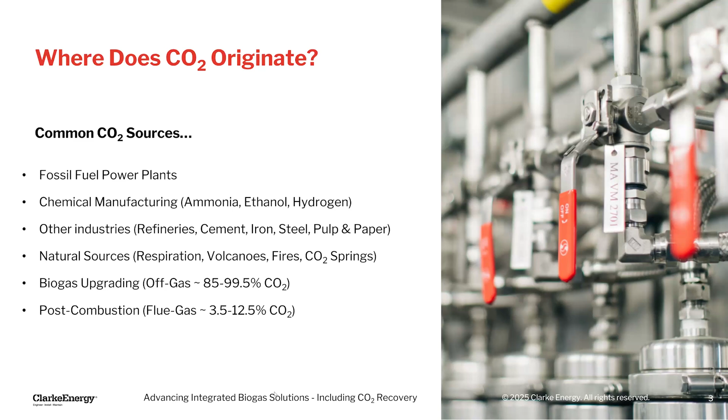Also, post-combustion sources. If you have a CHP project with a reciprocating engine, for instance, using pipeline gas, the CO2 content tends to be a little lower. Biogas tends to be a little higher, but 3.5 to 12.5% is probably a good rough estimate for the average CO2 content in the flue gas after combustion, with the bulk of that being nitrogen.

So then, how is CO2 used? CO2 has a lot of commercial applications in the world around us. Obviously, it's used in agriculture for a lot of purposes. You could put it into a greenhouse.

It exists at a couple hundred parts per million already in the atmosphere, but if you increase that by a couple hundred more parts per million in a greenhouse, you'll see a boost in the yield and production of that greenhouse. You could also use it in fumigation, fertilizer production, and other agricultural purposes.

It's used as a concrete additive. Meat and food processing facilities use it too. You produce dry ice blocks or pellets that can be used for cleaning processes, or shipping and packing meat products and other food products.

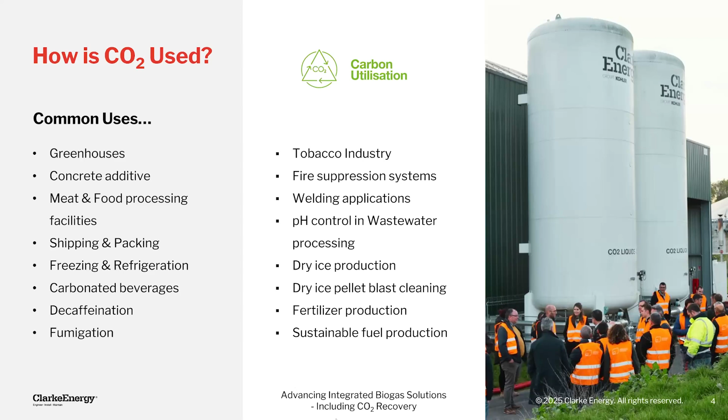Obviously, carbonating beverages—we all drink a lot of carbonated beverages, and that requires CO2 to be introduced into that product. Decaffeination and the tobacco industry have a need for CO2, as do pH control in wastewater facilities and fire suppressant systems. The list goes on. Even sustainable fuel, creating methane back from CO2, is another process with a lot of development. So there's no shortage of uses in the world for CO2 as a commercial product.

Now I want to highlight some of the states you'll see CO2 in. Obviously, you can see it as a gas. You can compress it, liquefy it, or make solid dry ice out of it. If you have gaseous CO2, it has fewer CO2 molecules per volume, so it's usually used more locally on site.

If you compress it, that requires energy, but you'll fit more molecules in the same volume and can potentially transport it more effectively. You could also liquefy the CO2, which gives a higher density of CO2 molecules per volume of space. That requires more energy but allows you to ship that CO2 more effectively. One thing to note is that liquid CO2 storage tanks tend to be a little higher in cost than gaseous storage.

Or you could make solid CO2, or dry ice, which is the highest density solution for the state CO2 could exist in. You could make blocks or pellets out of it, which can be used directly as a refrigerant or freezing agent. But note that you'll typically see a loss during dry ice production. So if you have a certain weight of liquid CO2 and create dry ice, you'll end up with roughly 75% of that weight as dry ice—it could be optimized to be more or less—but you'll end up with about a 25% loss of CO2 in that process.

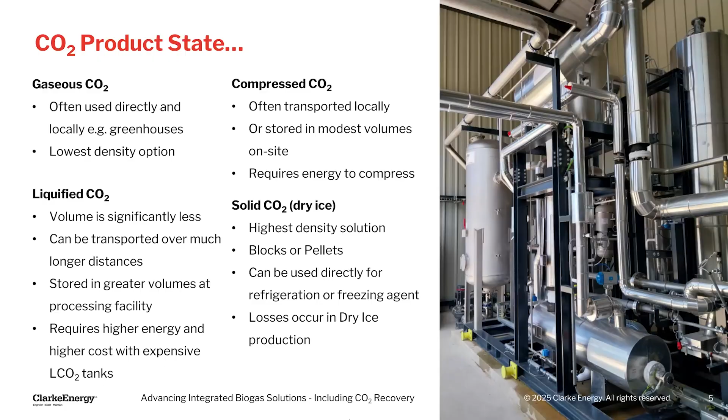But these are, from a high level, the different states that you could see CO2 utilized in. And then, what is CO2 purity? Because every application is going to require a little bit different purity of CO2. Some sources of CO2 are going to be better suited for different applications. I like to describe CO2 as kind of a spectrum of acceptance.

People would probably view human wastewater treatment plant CO2 differently than they would food waste digestion CO2 in terms of acceptance in drinking that in their beverage or for some other purpose. So there's different constituents in those CO2 streams coming from biogas, and they could be treated to different grades.

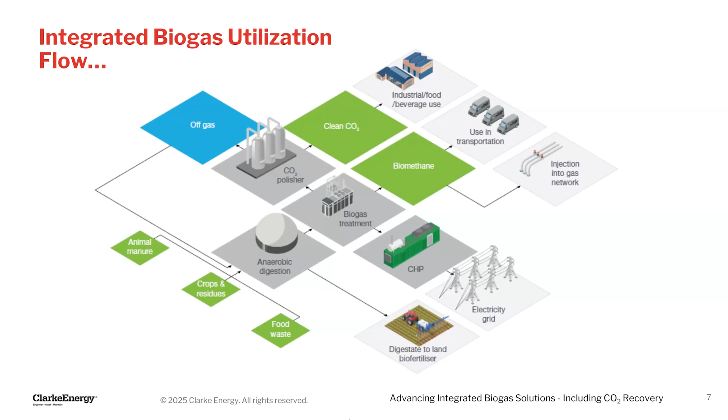The CO2 coming off of the RNG process could be polished and dried and liquefied and concentrated to make a liquid product. So there's quite a few different configurations, but that's an example of one there.

I want to go through some of the case studies and projects that we've worked through to highlight some of the benefits in these integrated solutions.

This first project was a Peak Renewable site in Maine. It's on Flood Brothers Farm. It's an RNG facility with CHP and backup power. In this facility, they have anaerobic digesters from several dairy farms.

The biogas upgrading was done by another group than Clarke Energy, but we brought to the project the combined heat and power unit and also the backup power system from Kohler, our parent company, or Kohler Power Systems, now rebranded Rehlko. But we brought those pieces of the project because it created some advantage.

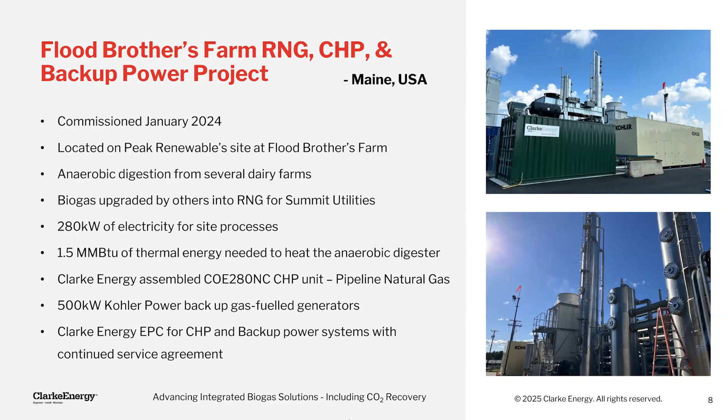There's 280 kilowatts of electricity that's generated from pipeline natural gas, and then 1.5 MMBTU of thermal heat is captured from that CHP unit and sent back to offset requirements to heat the material and then heat the digester system. So there's a benefit in providing some power to the system and also some heat to the system.

Another configuration that's a really cool project is our site, Biotown Biogas, in central Indiana. It's an RNG and combined heat and power facility that was commissioned in '22. The biogas upgrading system is about 1,500 standard cubic feet a minute, and we worked with a company, TPI, for the biogas upgrading portion of it.

We built the biogas upgrading and CHP portion of the project, and also operate that RNG plant with some service arrangements in place. The pre-treatment system for the renewable natural gas portion was sized larger than the requirements of the RNG system. So if they have excess gas generated in the digester, they're able to treat that gas and send it to the combined heat and power unit.

That CHP unit, the Jenbacher J420, generates about 1.4 megawatts of electricity output. It can be operated to run on biogas, natural gas, or a blend of both, depending on their requirements or needs. There's that flexibility, and then the heat from that CHP unit can also go back and heat the digester system.

You could also use it if you had a project site that wanted to use that heat for drying digestate material or some other requirement. That heat can be utilized as well.

The renewable natural gas from the project is injected into the natural gas infrastructure. They have a CNG vehicle fueling station on site as well, at that pipeline injection point, which is a really cool addition to a larger integrated approach with their project.

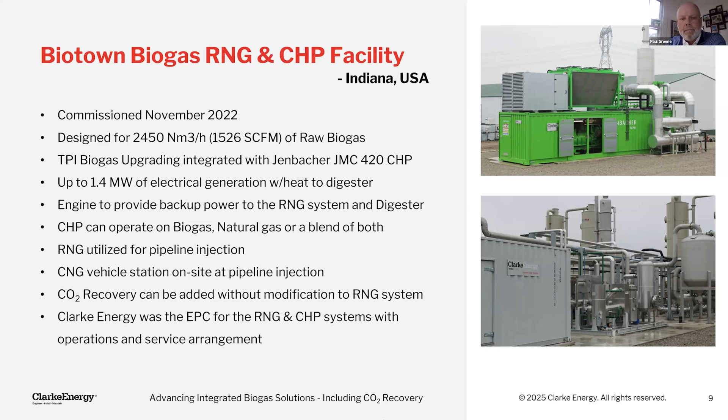So, I'm going to have a couple more slides on CO2, but, at least to hit home on why you would want to add combined heat and power to an RNG facility, for instance: you can create resiliency for the project by creating energy yourself. If there's some kind of disaster or an event that would create interruption in the grid supplied electricity, you'll have that available and you're less exposed to electricity rate increases.

Also, there could be a potential improvement in the carbon intensity score if the power that you're buying from the grid has less of a benefit, it has less impact beneficially to the environment than the power you would produce on site using natural gas, or if you would use biogas.

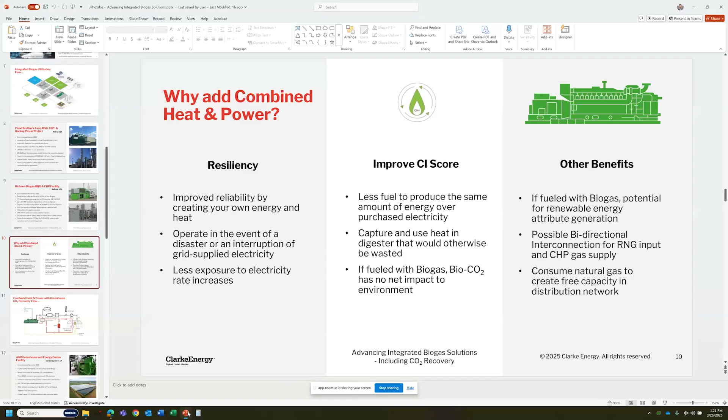Oh, sorry. I lost my presentation here, Paul. Hold on one second. Yeah, something happened. Yeah, we get a lot of office updates. Give me one moment. Let me pull it back up. Always have to have a hiccup. Technology. It's only a test. Yeah, exactly. All right, let me pull this back up, and my apologies. Okay, can you see it? Okay, good. Yeah, you're back. All right, perfect. So hopefully that won't happen again.

But if you're using biogas as the fuel that goes into that CHP unit, that could potentially reduce your carbon intensity score, being that bio CO2 isn't going to increase the CO2 to the atmosphere. Some other benefits: you could potentially generate some renewable electricity credits or energy credits using biogas.

One point I would note is that if you're going to add CHP to an RNG site, you can design the RNG injection skid or metering and regulation skid to be bidirectional. So in addition to doing the odorization, pressure regulation, nominating and qualifying, all of what's typically done in that injection skid, you could also pull gas back out of the pipeline you're injecting into to supply a CHP unit or boilers to help with the digester.

But you could even free up some excess capacity if your distribution line that you want to inject your renewable natural gas into is at capacity. That might help shore up some extra space to then be able to inject the RNG. So something else that could potentially be a benefit to a project.

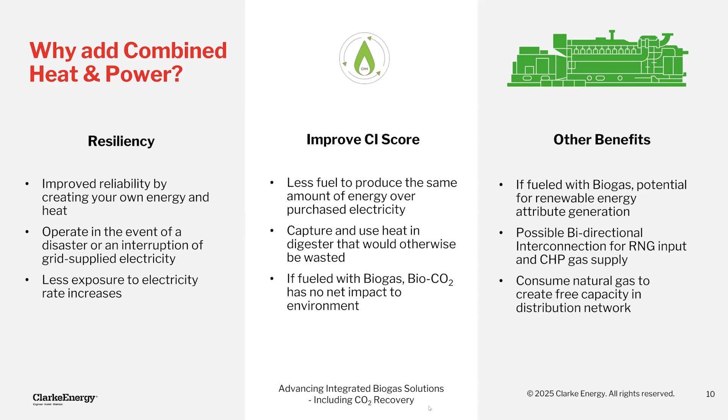So one really cool utilization for CO2 that I want to talk about, because it's something that we've done quite a bit in the past and is a little bit more simplistic approach, is pairing a combined heat and power process, where you're making electricity and also making heat, with utilizing that CO2 and recovering it in a greenhouse.

So under this configuration, you could treat the flue gas from the CHP unit, which would be, depending on whether it's biogas or pipeline gas, probably somewhere around 5-10%, maybe a little bit higher, CO2 in that flue gas. Treat it to remove NOx and carbon monoxide with some systems, and then send that CO2 to the greenhouse. Also send heat to the greenhouse.

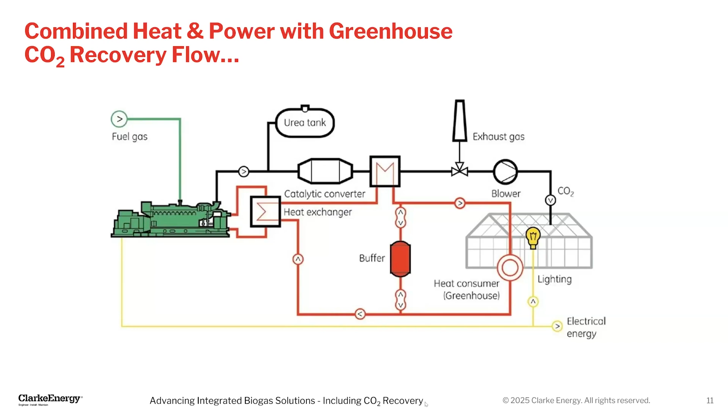And this same configuration can be done with a digester and with biogas. So if you have material that's being grown in the greenhouse that could potentially go into a digester system, create biogas from that digester system and pair it with the CHP for this same configuration.

Sorry, Paul, I lost it. I'm just going to keep talking now. But you can pull it up.

Sorry. You can use that digester, create biogas, and then use that material to feed back the heat requirements and the CO2 needs in the greenhouse.

I've also seen some potential applications using a renewable natural gas plant that would liquefy that CO2 and potentially truck that CO2 to a greenhouse, and that greenhouse could offset a retail cost for them to purchase renewable natural gas as well. So something else that's a pretty cool configuration. It's one of the more simplistic approaches towards biogas utilization with CO2 recovery.

All right, it looks like it's updating my Microsoft. I have a PDF version. I'm just going to work off that because hopefully that won't create any more issues. My apologies.

Okay. All right, can you see the slide now, Paul? Yeah, yes, we got you.

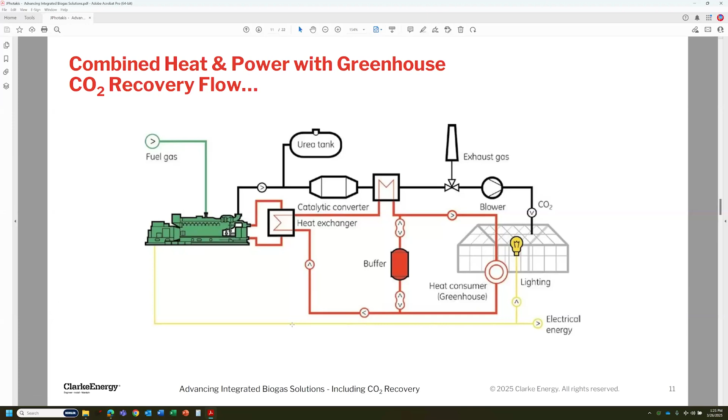Okay, perfect. So one example of this style of configuration is our AGR greenhouse and energy facility that's in the UK. It was commissioned in 2021, and this project is fueled on pipeline gas, but as I described, could be configured with biogas, and it increases the CO2 concentration of the greenhouse and the crop yields. And it has 3 INNIO Jenbacher gas engines paired with that CO2 recovery.

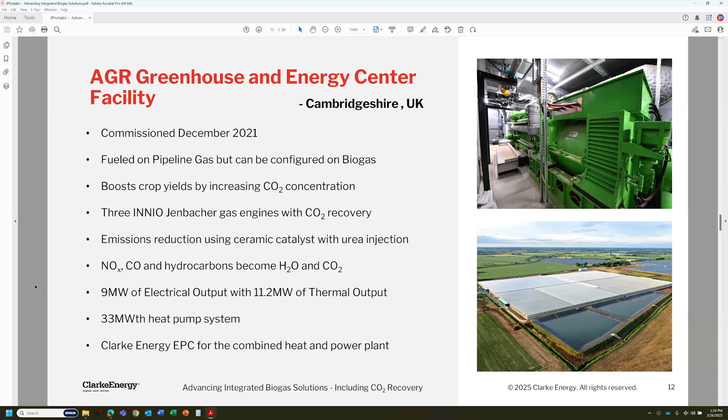The project produces 9 megawatts of electrical output, 11.2 megawatts of thermal output, and there's a big heat pump system associated with that. And Clarke Energy, we EPC'd and brought that combined heat and power plant to that project. So it's a more simplistic approach towards CO2 recovery, but one that has a benefit to the projects, having that CO2 be utilized and not just directly emitted to the atmosphere.

Another potential configuration, and one that we're working through, is a quad generation style configuration. In this, we would have gas engines making electricity, also making heat, and then pairing with absorption chillers and making cooling, a cooling refrigerant back for a process, and then taking that exhaust gas CO2, concentrating it, and then cleaning that to where you could make a beverage grade CO2 product.

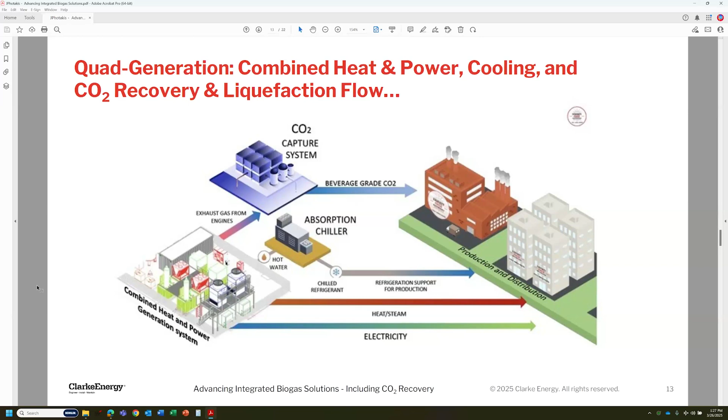So this is a configuration that we're working through right now. We're building it for Liberty Coca-Cola in New York. And it's the first of its kind in the United States, but like I described, it's making electricity, heating, cooling, and then a beverage grade CO2.

It is operating on pipeline natural gas, not on biogas, but this same style of configuration in its technical reality could work with taking wastewater from a bottling process or expired product, putting that through a digester system, having that digester produce biogas, and then that biogas either used in an engine for quad generation to create the CO2 that can be used back in the product, or do renewable natural gas upgrading and have that CO2 from that process be used back potentially in the beverages.

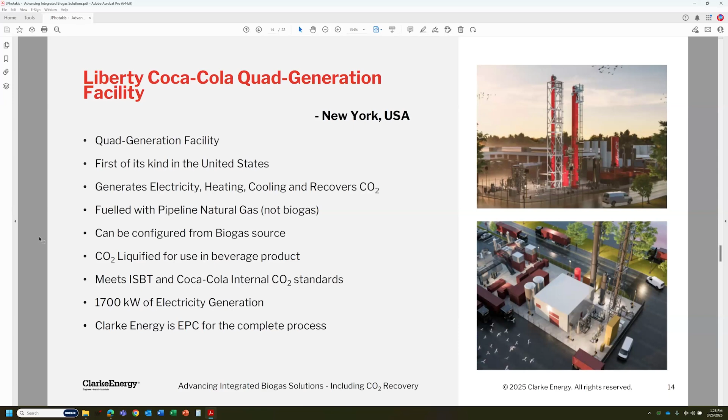And this project, once in place, would meet ISBT and Coca-Cola's internal CO2 standards. The project itself is generating about 1.7 megawatts of electricity, and we, Clarke Energy, were the EPC for this total process.

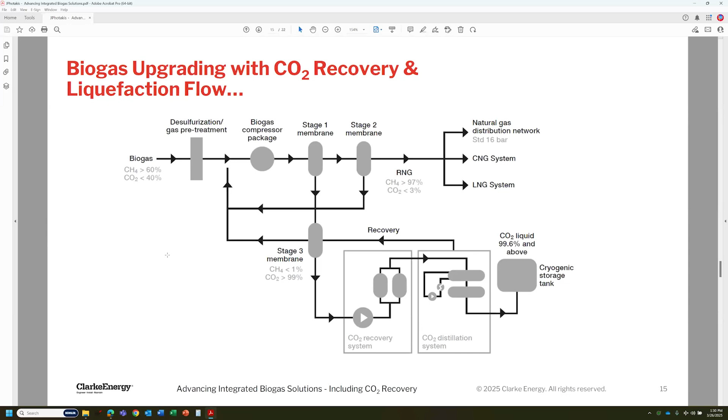So the first project I want to highlight is our Sanamethan RNG and CO2 recovery plant. This was inaugurated in '23 in northern France. It's an anaerobic digester that takes green waste and biomass and other agri-food industry waste materials and puts that through an anaerobic digester. At Clarke Energy, we built both the RNG and the LCO2 systems collectively at this site.

They're generating something like 400 normal cubes of methane, maybe 250 standard cubic feet a minute, roughly, and then also 460 kilograms an hour of separated CO2 in liquid form. That could be used and sent off for dry ice production. In the inauguration of this facility, they were making dry ice on site to demonstrate that purpose.

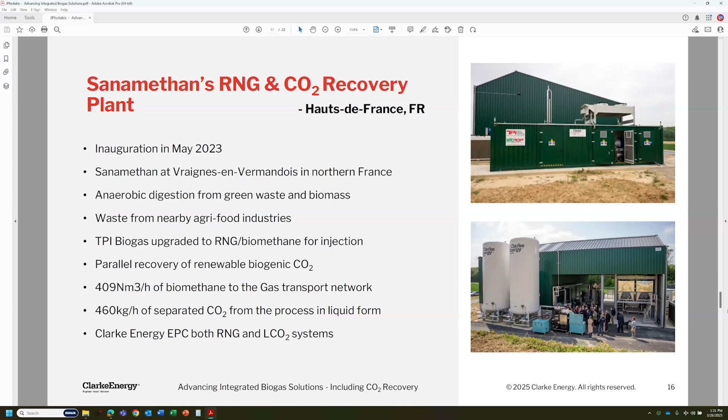And the second facility that I want to highlight is our MD Biogaz RNG and CO2 recovery plant. This was commissioned early in 2024 in France as well. And this is taking a similar mixed waste stream through an anaerobic digester. For this system, we worked with TPI to build just the CO2 recovery and liquefaction system. The RNG plant was done with a different supplier than TPI and was built with a different group than Clarke Energy.

So, the point to make with this style of facility is, you can pair CO2 recovery and liquefaction at a later stage to an RNG plant, and it can be done with a wide range of RNG processing technologies, all of which typically have a CO2 or off gas stream of different compositions. Most of the time it'll have pretty concentrated CO2.

If it's historically a two-stage membrane system, that amount of methane could be a little bit higher. Depending on whether it's a PSA or amine or how many membrane stages or a water washing system, they could have H2S or other volatile organics in it. All of that could be treated and addressed to then create a liquid product stream off of that process. And to note, at Clarke Energy we EPC'd the CO2 recovery liquefaction system, also the truck unloading station, and the liquid CO2 storage, and have a continued service contract with that facility as well.

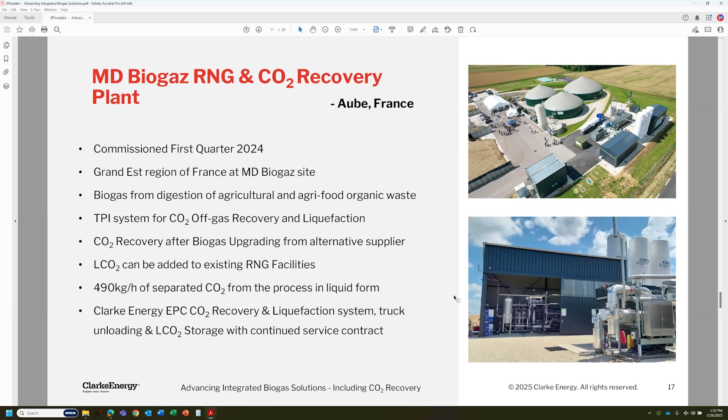So why would somebody want to add CO2 recovery to an RNG plant, for instance? Like I described before, there's market demand for carbon dioxide. It's used in many industries. They have seen shortages occur in the CO2 market. And I'll touch on this a bit, but there are government incentives for taking carbon dioxide and storing it in geological formations. And that incentivizes some of those large existing point sources to not sell their CO2 into the market, but instead generate credits that way.

And when those shortages have occurred, some of the lower volume customers have been cut off from their CO2 supply first. So that could avoid the impact on some of those supply chains by supplying CO2 into the market. One example configuration would be a meat processing facility that uses CO2 or dry ice, for instance, to ship their product. If they put their waste material through a digester, generate biogas, make renewable natural gas, and then create dry ice, they could use that dry ice to offset the retail price they're paying for dry ice today. That could be an advantage, especially when supply chains could be causing a price increase.

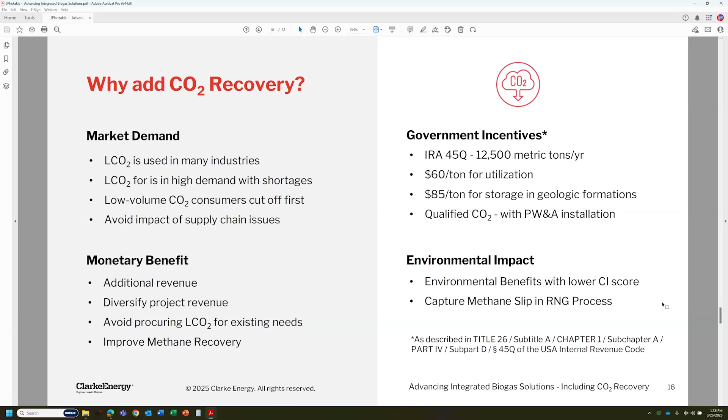But there's also an environmental impact potentially through utilizing the CO2 and doing CO2 recovery. If you're sending that CO2 to a consumer that would traditionally be using a non-biogenic source of CO2 instead of a biogenic source, that could be an indirect emission reduction off-site through their use. If you're sending it for geological sequestration, that would make your RNG product more carbon negative. And if you are capturing that methane slip and not sending it as a small slipstream to the atmosphere, there's going to be an environmental benefit to capturing that methane from the CO2 off gas.

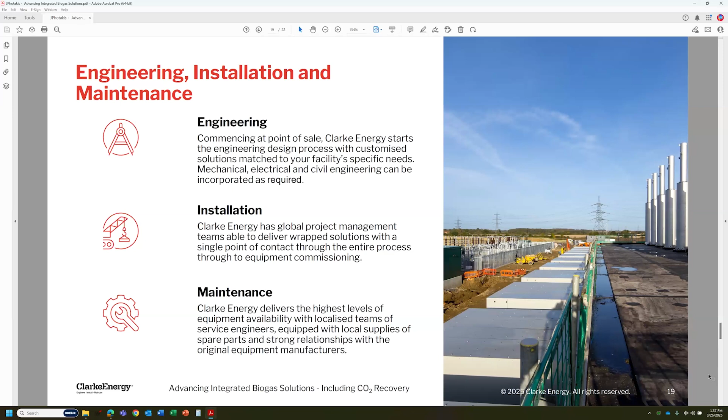So a little bit on Clarke Energy, we approach things doing engineering, installation, and maintenance on projects. We like to provide kind of turnkey approaches, a single hand to hold across projects. And then we like to stick around after we build out a project and see its continued success with maintenance agreements and service or operational agreements as well.